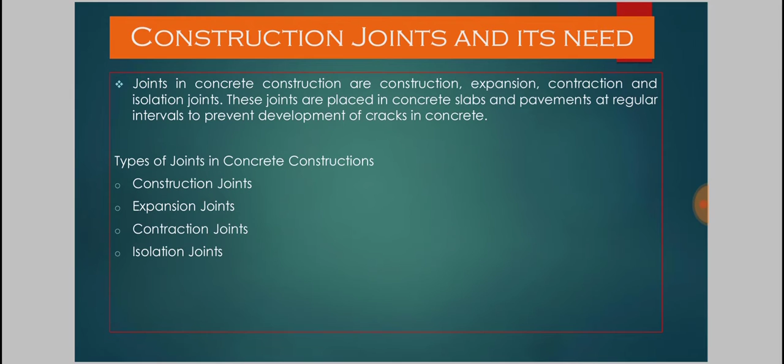Construction joints. These joints are installed to break up the structure into smaller units in accordance with the production capacity of the construction site. For monolithic concrete, a good construction joint might be a bonded interface that provides a watertight surface and allows for flexural and shear continuity through the interface.

For example, if we cast a road slab that is 75 meters in length, and in one day we are able to cast only 40 meters, the remaining 35 meters we have to cast the next day. In that case we generally have to provide a construction joint.

If there is any doubt as to the adequacy of the bond between the old and new concrete, the reinforcement crossing the construction joint should be supplemented by dowel bars. Basically, this type of construction joint is provided where fresh concrete and an old hardened concrete surface meet at a point.

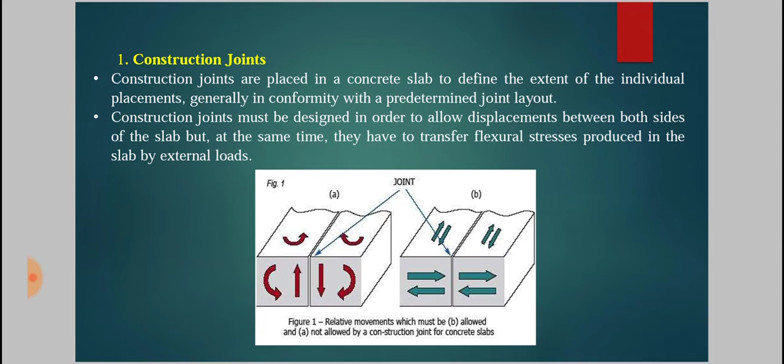Expansion joints. We know different building materials have different coefficients of expansion. Materials generally expand or contract according to site and environmental conditions. That means if heating conditions arise, the material will try to expand. Similarly, when cold conditions arise, the material will try to contract.

And if these relative changes are obstructed, that leads to cracks in the structure and may lead to the failure of the structure. So to overcome that situation, we provide the expansion joint. Basically, an expansion joint allows for relative movement, that means the expansion and contraction of the concrete during the curing period and during service.

These joints are used to permit dimensional changes in the concrete due to load, and they also allow relative movements or displacement due to expansion and contraction. This is the main purpose of providing expansion joints.

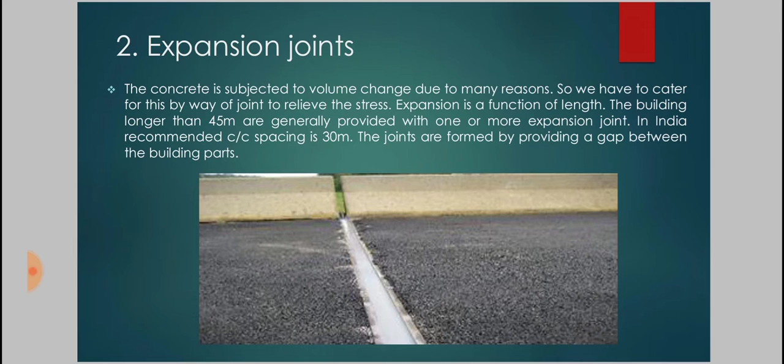Buildings longer than 45 meters are generally provided with one or more expansion joints. In India, the recommended center-to-center spacing is 30 meters. That means at every 30-meter interval we have to provide an expansion joint. You can see the figure of the expansion joint here. The expansion joint is provided here.

Contraction joint. We have already discussed expansion and contraction of materials, and what an expansion joint is. This is another type of joint, known as a contraction joint. In this case, a saw-cut gap is provided which allows contraction and prevents the structure from cracking. A contraction joint in a concrete slab is generally provided to prevent random cracking.

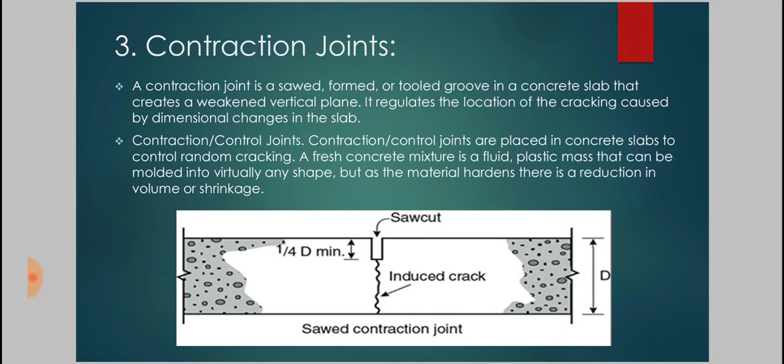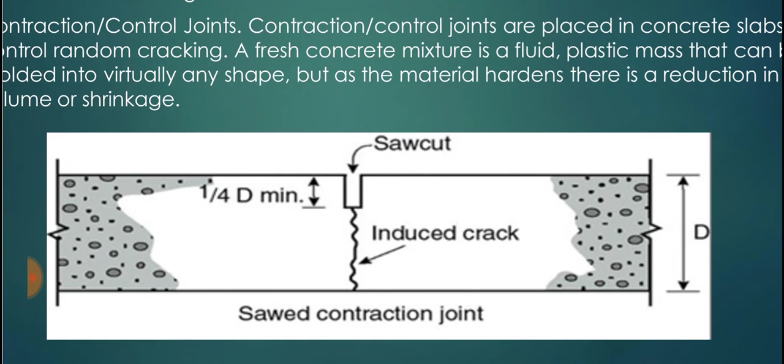You can see in the figure a saw-cut depth is provided. For example, if the depth of the slab is D, the saw cut provided at the joint is at a depth of 1/4 of D. This is called a contraction joint. One quarter of the depth is provided and the width is very small, a negligible amount, and this will allow the contraction movement so that the structure will not crack.

Isolation joint. This type of joint is generally provided where a wall, column or drain meets at a point. Its main purpose is to make the slab completely isolated from something else. Why do we provide this type of joint? As we know, a slab is a horizontal member, while a column is a vertical member, and a wall is also a vertical member of the structure.

In different environmental conditions, for example heat and cold, their expansion and contraction will be in different directions. So if we merge these structures, for example slab and column, we are obstructing the relative movement of both the column and the slab, which may lead to cracking of the structures. That's why we provide the isolation joint to overcome that adverse condition.

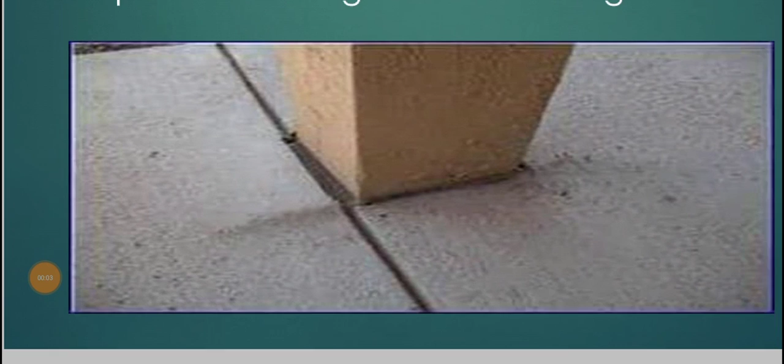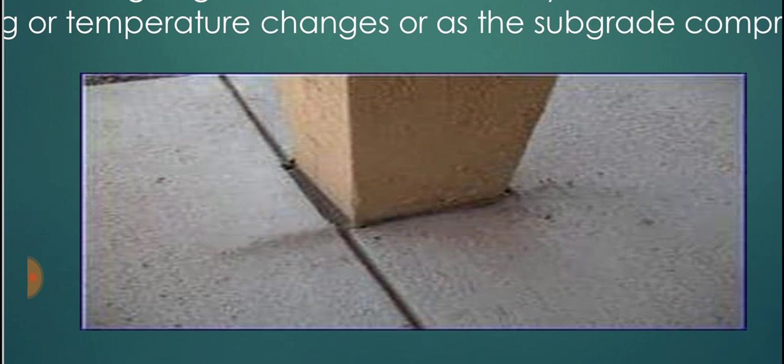So now the column will be independent to move, and also the slab. This type of joint allows free movement of both vertical and horizontal structures. As you can see in this close view, a column is there and a slab is there, and the isolation joint is provided on the left hand side. This joint will completely isolate the column and the slab portion.

So this is called an isolation joint.